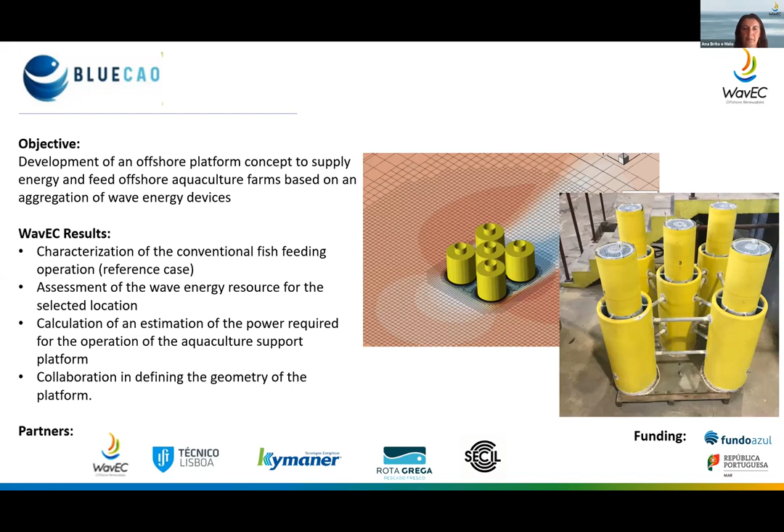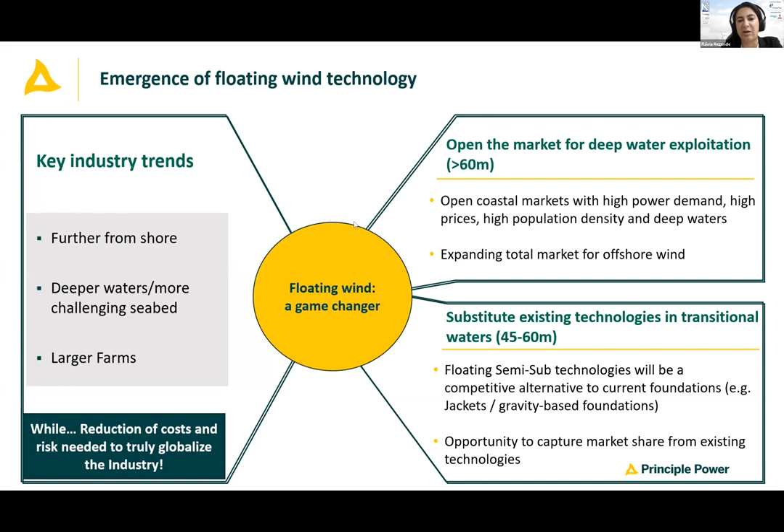So I will not repeat. I have removed the slide about the addressable market because that was presented before, in terms of gigawatts and how much it represents in different regions. I'll go straight to the presentation of the WindFloat technology, the floating foundation that we develop at Principle Power. I'll give you an introduction of the projects that we have done so far, and briefly talk about the future after that. So the WindFloat technology is a solution based on a semi-submersible concept.

The specificities about it is that it has 3 columns, and the turbine is installed on one of the columns, and the reason for doing that is to keep the turbine close to the quay, to be able to integrate it with cranes that can easily reach the column level and install the turbine without having to use installation vessels. So this is a key feature of the floater. As I think I saw in previous presentations, someone, I think it was from DNV GL, was talking about how scarce installation vessels are for turbine installation. So it's very important to lower the costs, to be able to integrate the turbine at quayside.

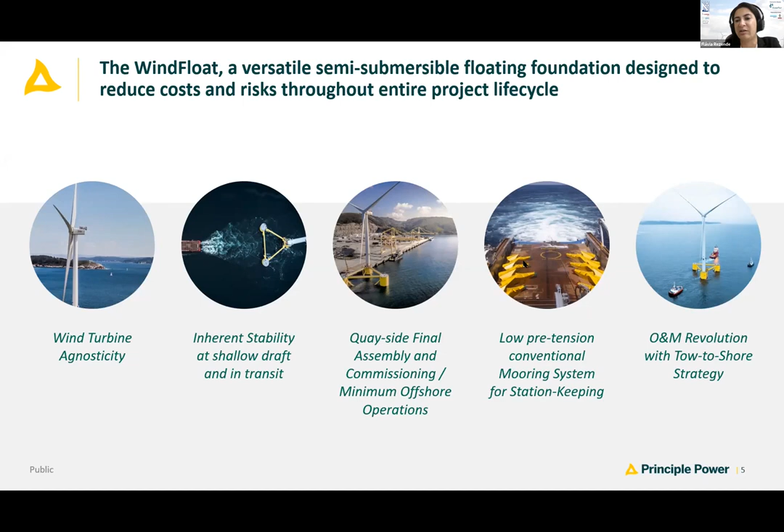So this is in a nutshell. Talking a little bit more about the mooring system, because this is also an important contributor to lower the CapEx, we base our solution on drag embedment anchors. It's a very common type of anchor and very easy to install. We use HMPE, which is for water depths in the range of 50 to 100 meters or more. HMPE has the advantage of providing very high stiffness to the system while keeping the weight very low. Keeping the weight low, as I said, is important to keep the pretension low and make the installation easier.

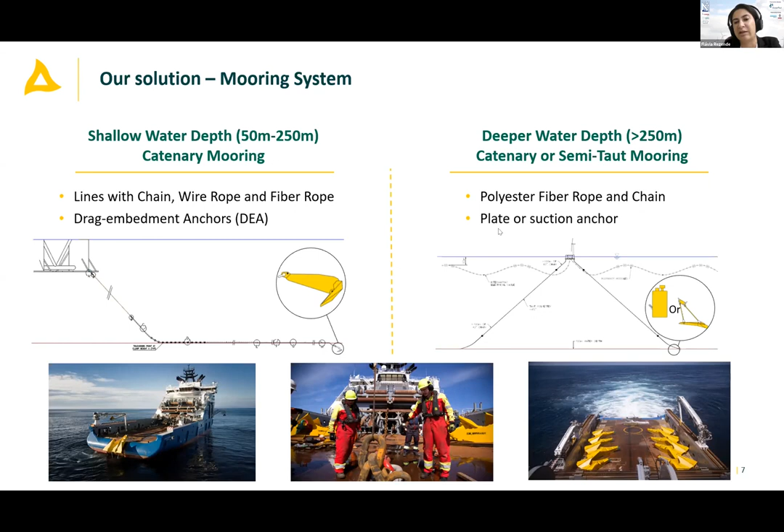We use also platform mooring connectors that are quite simple, like ball grab type connectors. And for deeper water depths, we are now moving to systems that are more semi-taut. In this case, we need to have a little bit more elasticity, so we go normally with polyester type of material, and also to limit the mooring radius. And then we go with other types of anchors, like high vertical load anchors, plates or suction anchors.

So talking about the projects and the path to the technology development, we have started with WindFloat 1 that Anna has presented. It's a 2 megawatt platform. This platform has operated for 6 years in Portugal. It has been decommissioned from the site, and we have refurbished and recommissioned it in Scotland, where it has operated for an additional 2 years, until we replaced it by 5 platforms of 9.5 megawatts that have just been commissioned. I think I'll show you a picture later.

So at this point of the prototype, what we are trying to achieve is to demonstrate the feasibility of the concept. Sorry.

Okay, this is WindFloat. So we are trying to demonstrate the feasibility and the reliability of the concept. And we are very happy now that we have gone through all the phases from construction till decommissioning, which helped us to collect a lot of data and to feed back into our latest projects. This platform has endured a lot of storms, including wave heights up to 17 meters. Also the latest one, WindFloat Atlantic, has already gone through a storm last year that is above a 1 year return period, with the 3 turbines operating during the storm without any issue.

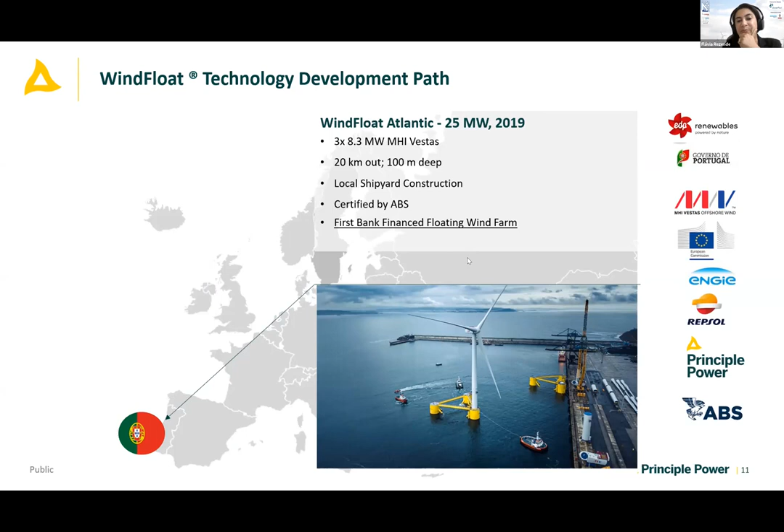This is just, let's see if it can work. This is one of a very large storm that hit Portugal 4th December last year, called the Dora, with significant wave heights in the order of 7 meters. And we can see that day, you see in the back the turbines spinning, and we can also see the floater behaviors, which are typical from a semi-submersible that is quite good.

One of the features of Windfloat is that we have an active system, because you can imagine that during a storm or even during a rated wind speed, there is very high thrust applied to the turbine. So this high thrust creates a very large overturning moment to the platform, and this deteriorates the performance of the turbine. So the active system actually balances the floater actively, moving water from one column to the other, to compensate for that action of the wind on the turbine. So you can see that even during this storm, the platforms are leveled and the turbines can operate in a good condition.

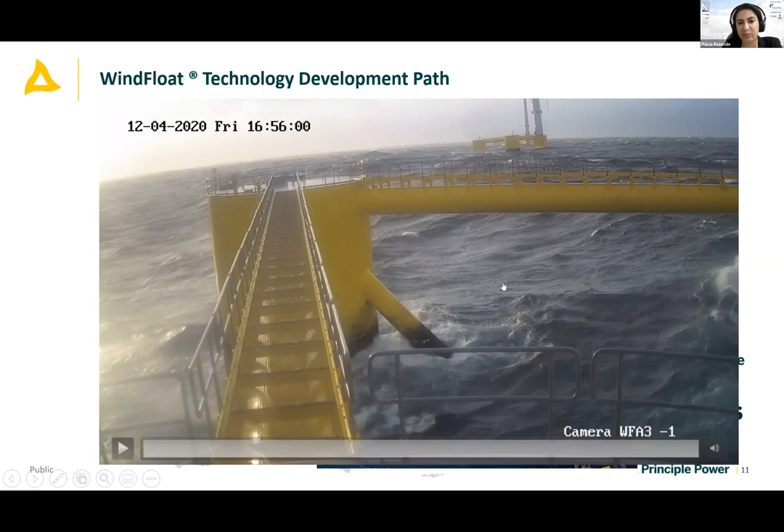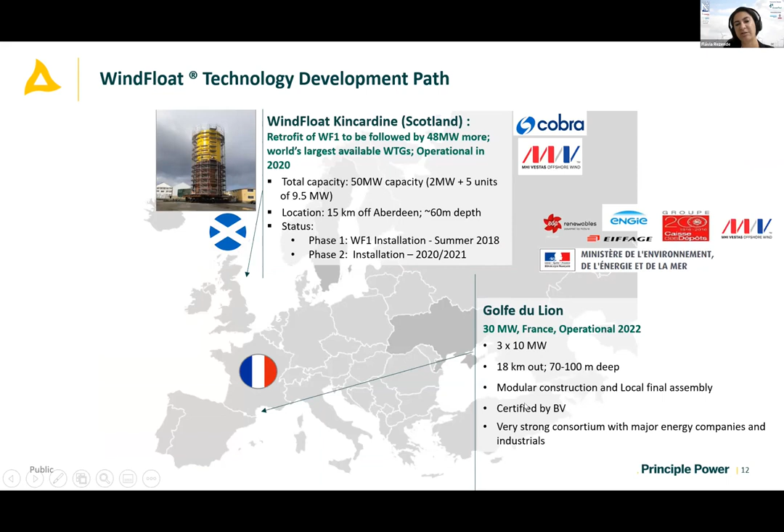So now what's next? As I said, we consider that this pre-commercial phase is reaching an end, and now the projects we are working on are already commercial projects or industrialized projects. So we are talking normally about between 10 and 50 units or more for the industrialized cases. Now we are focusing on a phase where we need to reduce costs and make this scalable. So that is our focus right now: rather than to prove the concept, which is already proven, is to make this concept scalable.

So our top priority right now is to optimize the design of the floater, working together with the turbine manufacturer to co-design and co-control the platforms, not looking into an individual platform, but on a farm. So we have projects where we can, for example, optimize the performance of the wind turbine through our control system to better orient the platform with respect to the wind, to optimize power production. Also, we have projects where we look into shallow water depths, this transitional depth between 45 meters and 60 meters, and also very deep waters in the range of 1,000 meters or more.

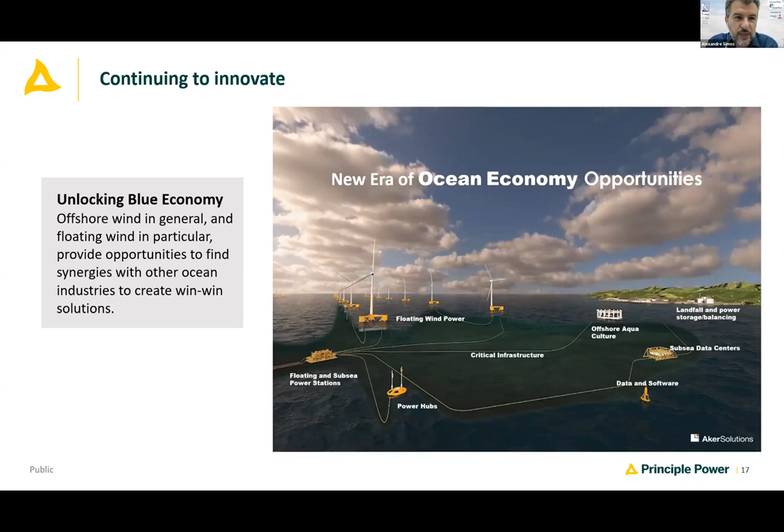We have time for one question at least, which would be, I think that for us here in Brazil, Flavia, as you know, most of the attractive areas for offshore wind are in shallow water, right? If you can just comment briefly on the competitiveness around this transitional area that you mentioned, close to 50 or 60 meters maybe. Can we expect in the near future the costs of floating wind to continue to approach the costs of fixed offshore wind? Yeah, this is our goal.

That's what we are working towards. Well, let's say that I think both have their place. As I said, I don't think we should claim that it's competitive. We are competitive. Floating wind is competitive in water depths above 40 meters.

In the transitional area, there are a number of features where we can have an advantage in floating wind, which would be in terms of turbine integration, for example, in areas where there is limited resource for offshore turbine installation, for example, installation vessels. As we said, we can integrate at quayside.

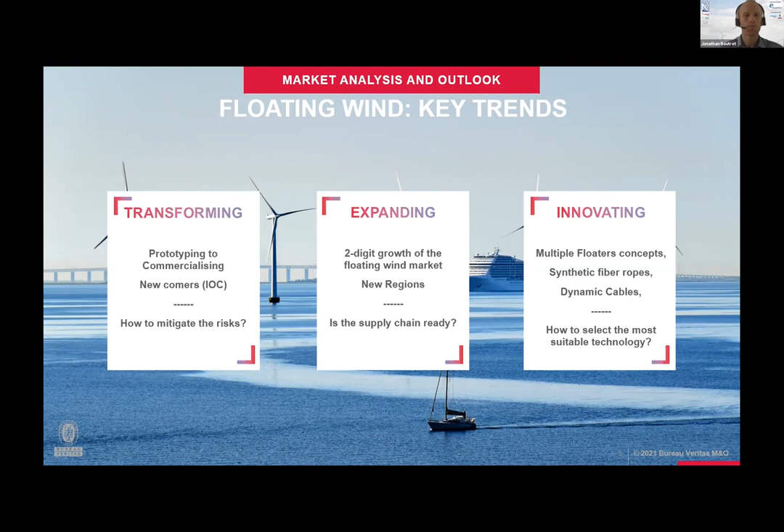So in this section, I will give you more details about the certification of marine renewable energies. First of all, you have to know that in most cases, certification is not mandatory. It means that it's not imposed by the local authority. On the other hand, it will usually be strongly recommended or even imposed by different stakeholders, typically the insurance companies.

There are several types of certification. The first one I will describe is the approval in principle and also the prototype certification. That's typically addressed to technology developers and designers, aiming at enabling the go-to-market of new technologies. After that, we can also provide project certification. Here it's mainly addressed to project developers or operators, with the objective to de-risk the projects and improve their safety and quality.

If we are performing certification of floating wind projects, it's because the certification body is in a unique position to de-risk the project. Let me explain on that. The typical setup of floating wind projects involves many different actors. You have the project developer, then you have the turbine OEM, you have also the floater designer, and even the dynamic cable designer. So you have a lot of interfaces between all these different actors, and obviously they have to exchange some information for designing their components, but it's limited due to IP or confidentiality.

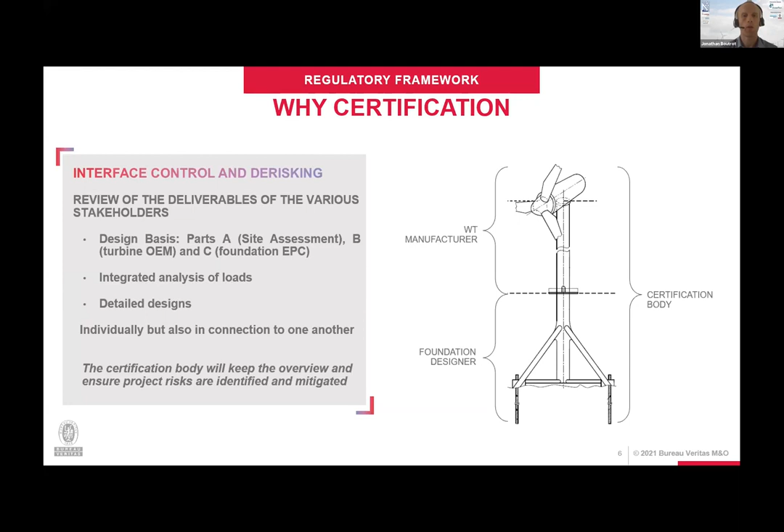On the other hand, the certification body is in a unique position to gather all the different information coming from the different designers, for instance, the turbine controller, because we'll have to build our own independent complete model of the wind turbine, including the turbine, the floater, the mooring system, everything, to verify the loads in the wind turbine. So it's very important to have a certification body on board as a third party, having a look on the entire project.

So talking about certification, indeed, this is an exercise of conformity assessment to technical standards. The certification schemes or procedures are explained in some guidelines, for instance, the IEC RE for renewable energy OD 502, or equivalently the BV guidelines NI 631. Here you will find the different certification schemes, the input, the output, and also the process will be described. And as I say, then it will refer to technical standards.

So coming back to this example of floating wind applications, technical standards applicable most of the time to the turbine and the tower will be the ones published by the IEC TC88 working groups, so that's the 61400 series. And for what concerns the floater and the mooring system, usually here we'll refer to the classification society's rules, for instance, the BV NI 572 for floating wind projects.

So just a few words on these technical standards. The NI 572 will give you technical requirements to be addressed by the designers all along the project lifecycle. If we focus on the design phase, you will find requirements on the materials, the design conditions, the load cases to be considered, but also requirements in terms of stability, structure design, so strength and fatigue, and it also covers marine systems. We've also published equivalent guidelines for current and tidal turbines, the BV NI 603.

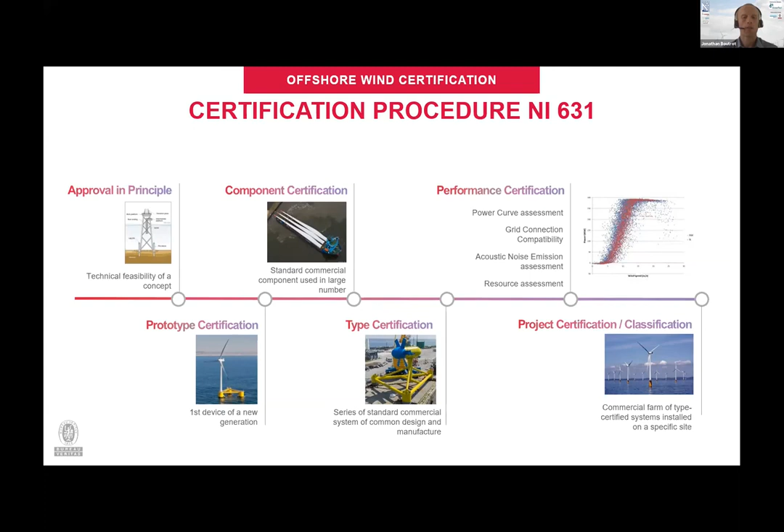So the type certification is not specific to one project. It's covering different types of project, many applications. So it means that in the context of the real project certification, we will not evaluate again all the internal components of the turbine, but we will just evaluate the validity of the type certificates. I will come back to that point.

Let me give you a bit more details on the approval in principle. As I said, it's a kind of concept certification, addressed to designers. The main objective here will be to establish the design codes to comply with. For offshore wind, it's obvious because technical standards are already available. But if I consider emerging technologies like floating solar, for instance, it's not an easy task to find appropriate technical standards. So here we have to benchmark the existing design codes and sometimes adjust some requirements to address one specific technology.

The next objective of the AIP will be to verify that the design is feasible, achievable, and contains no technological showstoppers that may prevent the design from being mature. So here it's important, it's kind of de-risking of the technology.

And at the end, the certification body will issue comments and recommendations to be addressed during the further steps of development. It's because at AIP level, usually the designer cannot consider all the different comments, but let's say the concept will at the end be a prototype, then some additional comments or recommendations will have to be addressed.

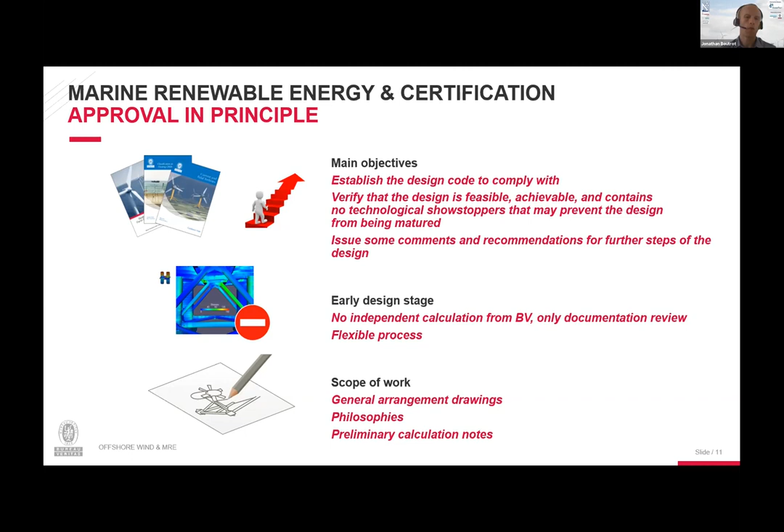For what concerns new technology, sometimes it's not possible to certify it as is, and before certifying this new technology, we have to qualify it. So at BV, we have developed guidelines for the qualification of new technology, which are based on risk considerations. So typically, we will perform HAZID, HAZOP, and FMECA, failure mode effects and criticality analysis, such as to be able to qualify the new product, new technology. After that we'll be able to certify it.

So now let me give you a bit more details on the project certification. So as I said, when we have to perform the project certification, we will consider the type and component certification which have been performed. So it means that we will evaluate the validity of the type certificates.

So this project certification scheme that you can see on the right-hand side of the slide is made of independent modules that are evaluated by the certification body one by one. And for each module of the certification, we will issue two deliverables, a conformity statement for this module and an evaluation report.

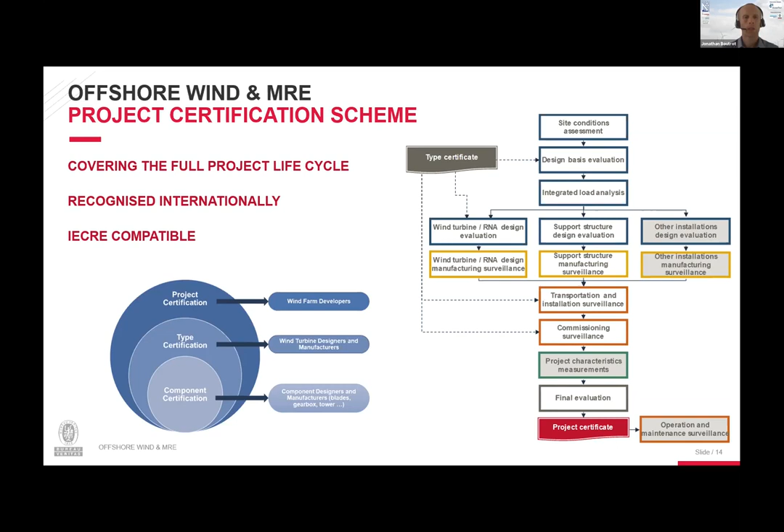So very quickly, I will go through all these modules. So the first one is site condition assessment. So here, the key question is to know if the assessment is adequately undertaken by the designer and well documented. So here I refer to the metocean conditions, the wind characteristics, regular wind and turbulence, and also the geosciences aspect.

Next is the design basis evaluation. So here it's not only one document, but it's several design bases. So the part A, which is produced by the project developer and mainly addressing the site environmental conditions. Design basis part B covers the wind turbine and the tower. So that's obviously produced by the turbine OEM. Part C will cover the foundation, fixed or floating, and including the mooring system if it's a floating foundation. And part D is for the other items like the inter-array cables.

So here, as a certification body, we'll just make sure that the different technical standards and norms used by the designers are coherent at the interfaces, so between the turbine OEM and the floater designers, for instance, and that there is no gap in terms of technical standards. Another thing that will be carefully checked by the certification body is the design methodologies. So at this stage, we will review the load cases, we'll review the fatigue methodology, the load analysis as well. So all the different project methodologies will be evaluated.

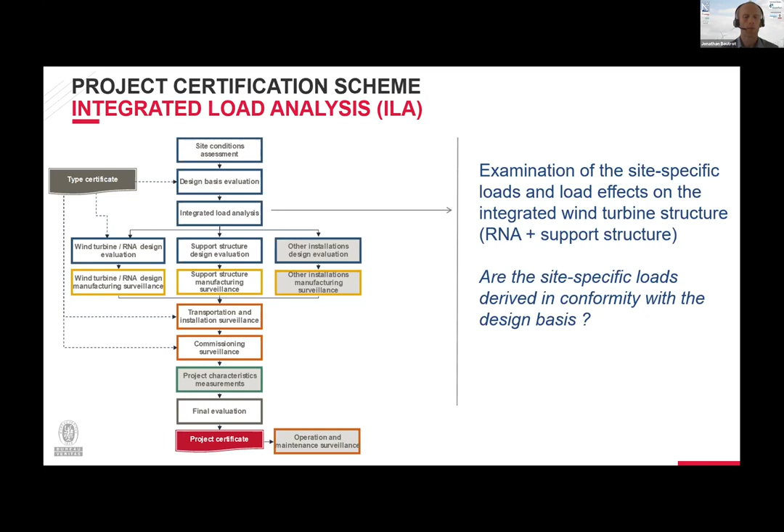So let's say that you have validated the type certificate. It means that in terms of detailed design evaluation of the wind turbine, you don't have to do much because it's already covered by the type certificates. On the other hand, you'll have to analyze carefully all the site-specific components. So that's the tower, which is designed for, let's say, optimized for each site, the foundation, floating foundation and the mooring system, and the inter-array cables, if covered by the certification.

So during this design evaluation module, we will make sure that the methodologies that were described in the different design bases are properly applied by the designers. And in parallel, we'll also perform independent analysis to validate the results of the analysis performed by the designers.

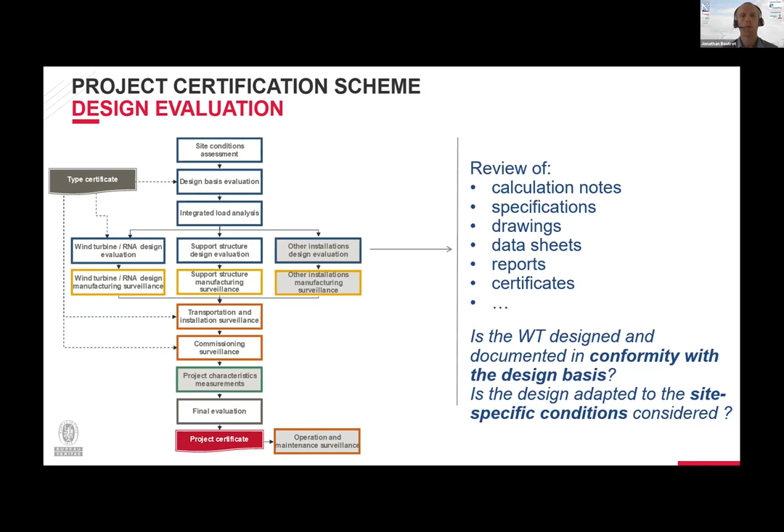So the next steps are about manufacturing, transportation, installation, and commissioning. So here there are two main activities. The first one is the documentation review. So we will review the quality system of the different sites, just to make sure that the manufacturing site is certified according to ISO 9001. We'll also make sure that the different welders and NDT operators are qualified to perform their jobs.

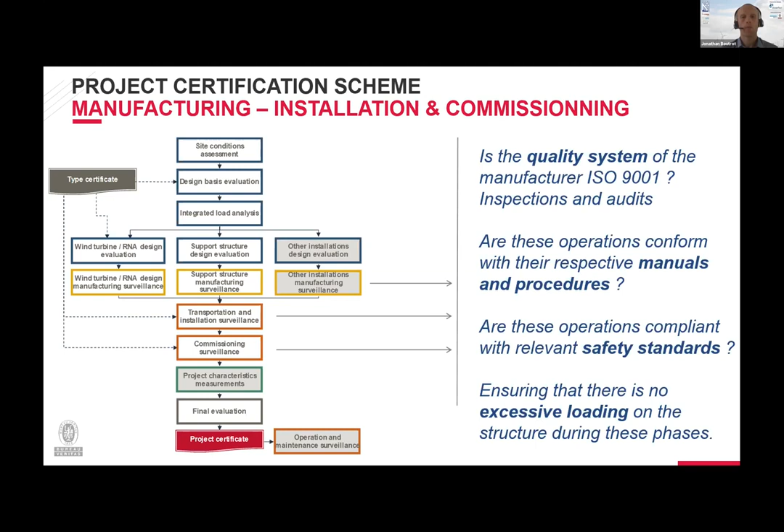After that, we will also perform regular inspections, such as to evaluate the base materials. So we'll review the steel or different materials certificates. And we'll also witness the different assemblies that are produced by the manufacturing places. So we'll carefully review the different welds, the tolerances in terms of misalignments, etc.

During the T&I phases, we'll act in parallel to the marine warranty surveyor, which is another third party acting during the same phase, but looking at different things. So here, we'll just make sure that the transportation and installation procedures are in conformity with the methodologies that are described in the different design bases. So that's the primary objective.

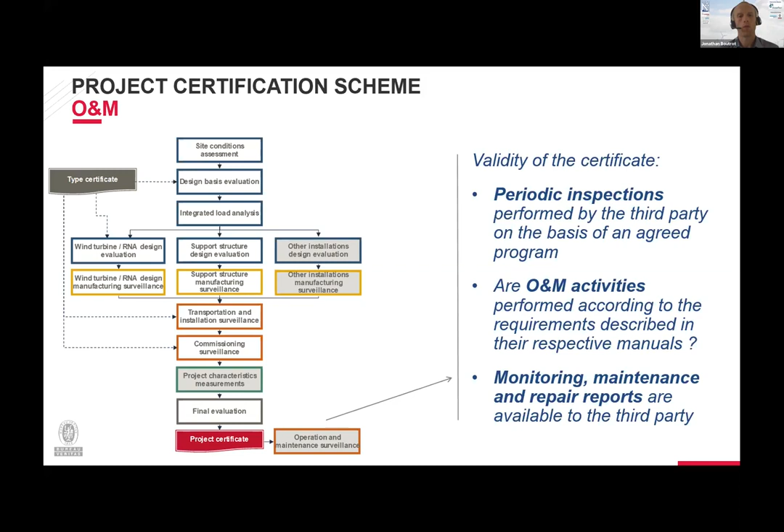So once we have validated all these different modules that I've explained, we'll be able to issue the final project certificate. After that, we could also certify the O&M, so the in-service phase, performing regular inspections, periodic inspections that are based or not on RBI, risk-based inspection regime, and agreed with all the parties involved. So that's it for me for this overview of the project certification.

Don't hesitate if you have any question. I can take a couple of them, I think. Thank you very much, Jonathan, for the nice and instructive presentation. Certification is surely one very important topic in our discussion today. I think we have time for one question.

I have one from the audience, from Ingrid Silveira. I don't know if you can answer on that, because it's related to wind measurements. She says, what is usually the certification procedure for offshore wind resource measurements? Is there a common understanding about the best practice for this procedure? For example, LiDAR measurements or onshore met masts?

Yeah, so usually a floating LiDAR will be deployed on site. So I think that's maybe the best option and most accurate option. If you want also to optimize the design, the first step will be to evaluate properly the environmental conditions, because we know from experience that it has a very strong impact on the design. Maybe the wind turbulences, for instance, may have an impact on the fatigue performance of the mooring system in some cases. So I think it's very important to evaluate properly the site conditions.

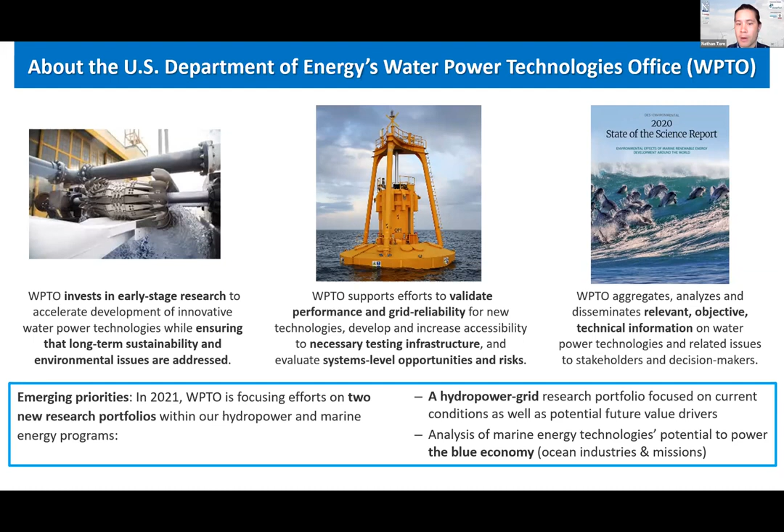Also, and I believe this was already shown by the first speaker, helping to evaluate environmental impacts of marine energy and traditional run-of-river systems on the environment. So why we need the funding and support from the WPTO: I expect that everyone on this presentation is a naval architect familiar with working in the water, and we know that working in the offshore environment is difficult. At least for marine renewable energies right now, we have a fairly prolonged design and testing cycle of taking something from paper, getting it to a sub prototype in a wave tank, to getting it to a smaller pre-commercial offshore device, and going all the way up to a larger WEC array or marine energy system array.

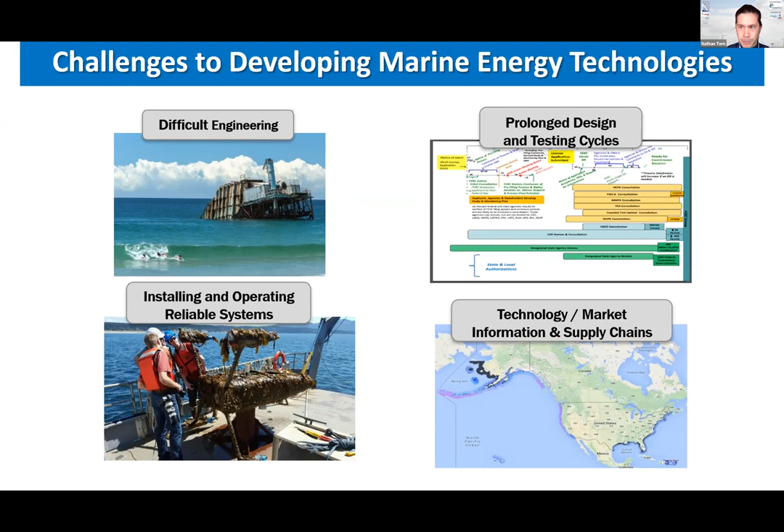And so in response, compared to some of the other renewable energy technology programs funded by the US Department of Energy, such as solar and wind, the marine energy group is much younger. There was not really an official program established until 2008. At that time, it was mostly getting a program established within the United States, establishing a set of national marine renewable energy centers, which consist of different universities in the US that focus on marine engineering, specifically marine renewables, and also establishing several federally funded laboratories to do work in this field, which includes NREL, the Pacific Northwest National Laboratory, as well as Sandia National Laboratories.

And so from 2008 to now, there have been several major projects and efforts, starting off by giving funding to industry to develop concepts, given that really long design timeline mentioned on the previous slide, getting developers working to get prototypes in the water, doing resource assessments on the US and all of the contiguous islands, and starting to do reference models to see where we are. The reference model project I'll discuss a little later, but it was benchmarking the state of the art earlier in the 2010s.

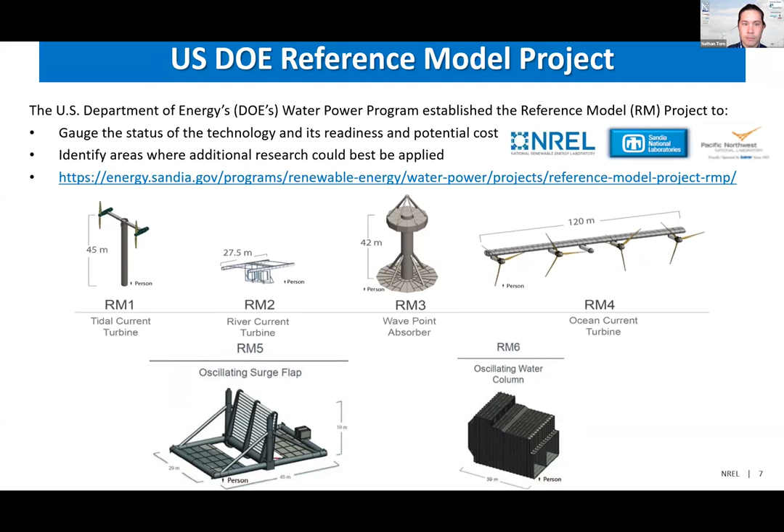And then one of the largest devices that is going to be tested, and is, I believe, right now in dry dock, or at least at its berth in Hawaii, is the Ocean Energy OE35 oscillating water column. And that is kind of where a lot of our developers go to do their first testing. It's the first time in the water with a fairly large device.

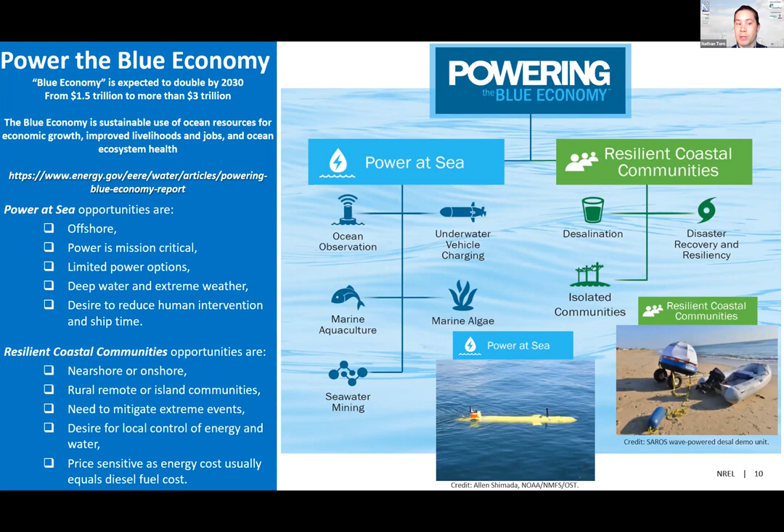And it's a really good case study of ORPC had spent a lot of time with the community figuring out what they needed. It's easy to say that we want to transition this community off of diesel, but it's very important to figure out what they need. They want to make sure that the lights are always on, and they also are very conscious of the environmental impacts because it has a very large salmon run through their village, which is what they need to survive. And so it was just a really good, I think, case study of how, as engineers, we need to go into a community, make sure that whatever we are designing is going to fit what the community needs, because if not, then they won't ever adopt it.

We also are looking at supporting some of these research efforts through prizes. So one of these is the Department of Energy's Waves to Water Prize. And this is looking at trying to develop cost-effective desalination systems that are powered by renewable energy systems. This prize is a little bit also looking at trying to find designs that can support the disaster recovery. So one of the key features of this prize is that any concept that anyone is proposing would need to be set up within 48 hours.

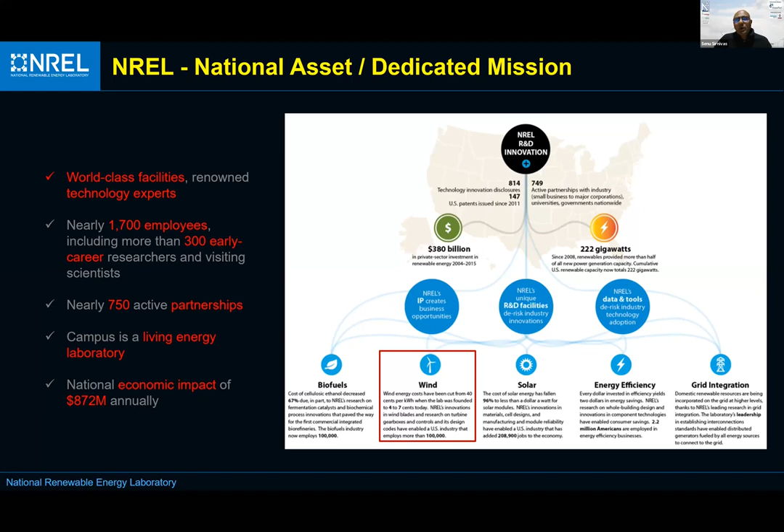One other thing I want to mention is we also have a lot of industry collaboration, not just with academics, but also industry, like GE and Siemens and so on on the wind side. And as Nathan mentioned, we work with a lot of the water power folks as well. So I just quickly wanted to show you a picture of the campus itself. This is the wind side, not the main Golden campus.

This is a campus where we actually have wind turbines on site, and we instrument them and test them. We have very strong, extreme winds coming down from the other side of the mountains, up to 80 miles an hour, hurricane level winds, and sometimes the wind center closes down because the winds are just too extreme. We instrument the blades, and we have met towers there to measure the wind and see what happens to the blades.

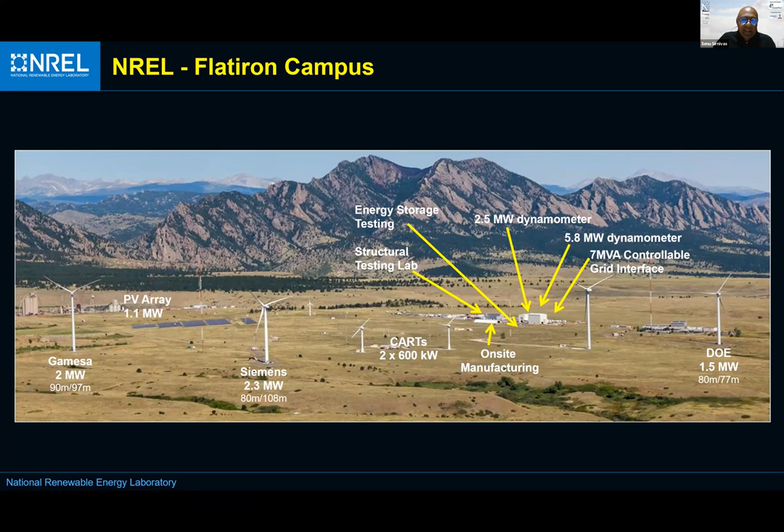We have a structural testing center where we can test the blades until they crack and do fatigue testing on them. We have a dyno, and what's next on the list is a power control center that can integrate power coming from solar, from wind, from different sources, and figure out how we control it in the grid. That's not shown here on this picture.

Moving on, I quickly want to address why floating offshore wind, at least in the U.S. The recent administration, the Biden administration, has put a big focus on climate change, and also a big focus on offshore wind, and it's been talked about quite widely here.

The only way we can get to what the government needs, 35% wind electricity, is to go to offshore wind, because land-based wind already occupies a lot of the middle part of the U.S. There's still space there, but we cannot get to 35% U.S. wind electricity without going to offshore wind. So I just quickly want to illustrate that.

If you look at this chart, you would see that fixed bottom is about 42%, that's about 36 gigawatts. When I say fixed, I'm talking about less than 60 meters depth. And then floating is above 60 meters, and we're at 58%, right?

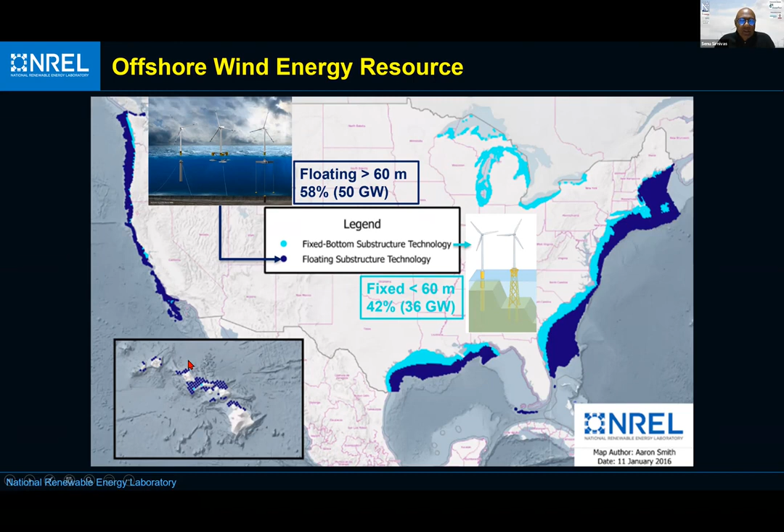But you can see the first projects that are probably going to go in the water are going to be fixed bottom. There's already one in Rhode Island that's been operating 5 turbines out there, 6 megawatt each, I think, and that's fixed bottom. And there's a lot of leases that have been awarded in the New York area and New Jersey area. There are leases being planned right now for California as well. And there's also very deep waters in Hawaii as well, right?

So if you look at the US, we're behind in terms of deployment compared to Europe. Europe is just way ahead in the game, but from our side, we have to compete with other energy resources. Even though they're not renewable, we have to compete with them, and we have to have a market for them. And I'll talk about that in a little bit here.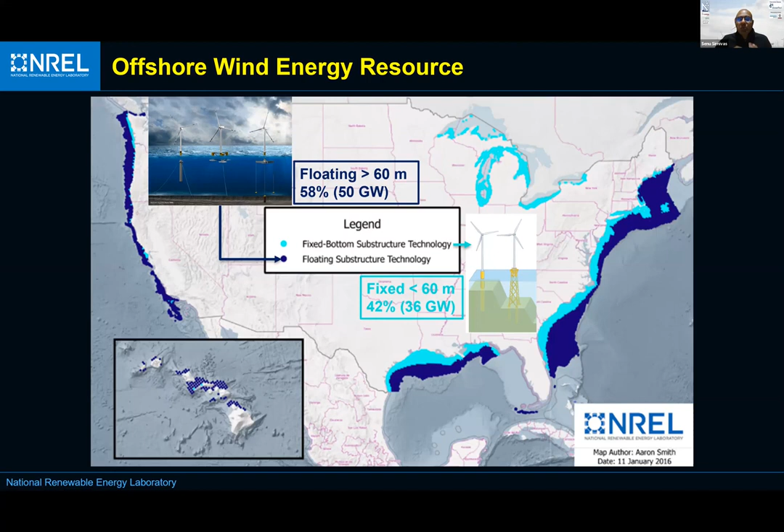So moving on to the next slide here, to just quickly address, what was the problem with floating wind to start with? One of the problems we had with floating wind is, we are borrowing a lot of technology from oil and gas, right? And I come from this industry, and we always build one-off things. We don't mass produce them. We build one-off things for a specific site. So we have taken this oil and gas technology, and now we have floating offshore wind, jackets or monopiles or whatever. They're all really borrowed from oil and gas.

And one of the things that I wanted to say was, I think there are better ways to design floating wind technologies, or even jacketed structures for offshore purposes, to bring the LCOE down, to make it competitive with other sources of energy. And at least in the US here, there's been a big push from the Department of Energy, particularly ARPA-E, recently. Last year they had an award for 5 different Area 1 projects that were looking at innovative structures for floating platforms.

And the idea here is to look at the system integrated, right? And what I mean by that is, you're not just going to do a decoupled analysis, getting information from the turbine manufacturer and then, uncoupled, doing a simulation with the floater itself. What ARPA-E wants to do is what's called control co-design. How does the whole system react, and how can we optimize the entire system? That includes the turbine, the tower, the platform, the mooring system, anchors, and so on, right?

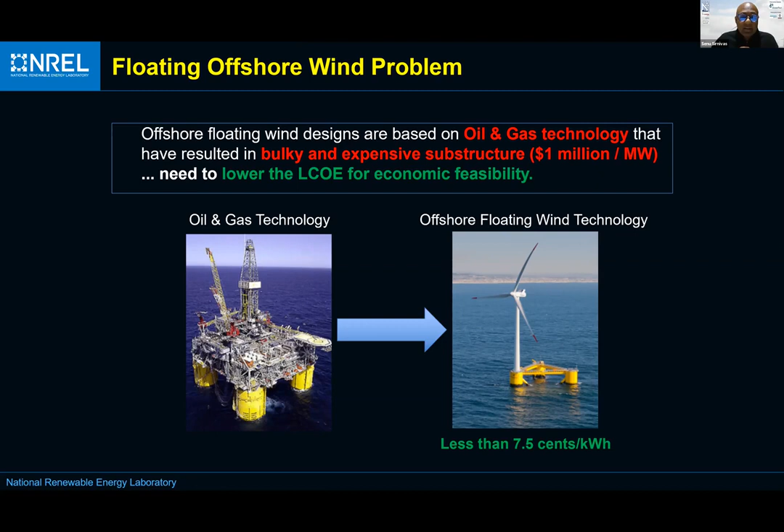And the other thing that's important for wind, and I think this is true everywhere, and particularly here in the U.S., is collaboration. So one of the things I want to say, a lot of the tools that NREL has are open source.

You can go download them, you can use them, and you can go into the forums and ask questions. So we have these advanced tools that we have at NREL here. We work with standards, we work with theory, and innovations, like for example, what's coming out of ARPA-E, and we're modifying a lot of our codes to adapt to the innovations that are coming out of the Area 1 teams there. And we are making our engineering tools so we can look at advanced wind technology, right?

We have test data, and we have a computational center here with high fidelity modeling, where we have an HPC center that allows us to run very large simulations in computational fluid dynamics as well. So we incorporate all this, and then we have the advanced wind technology. And now what we want to do is, the labs can't just isolate themselves and work by themselves. We have to work with industry.

If you look at it, the wind industry is ahead of the water power industry in the sense that there are commercial applications for the turbines and whatnot. So they are way ahead. And how do the labs such as NREL and other labs work with industry to actually advance the solution, right? So in this space, we're looking at a lot of different things. We're looking at new actuations, advanced sensors, definitely a lot of CFD solutions on how to do wind plant control and not just control of individual turbines, right?

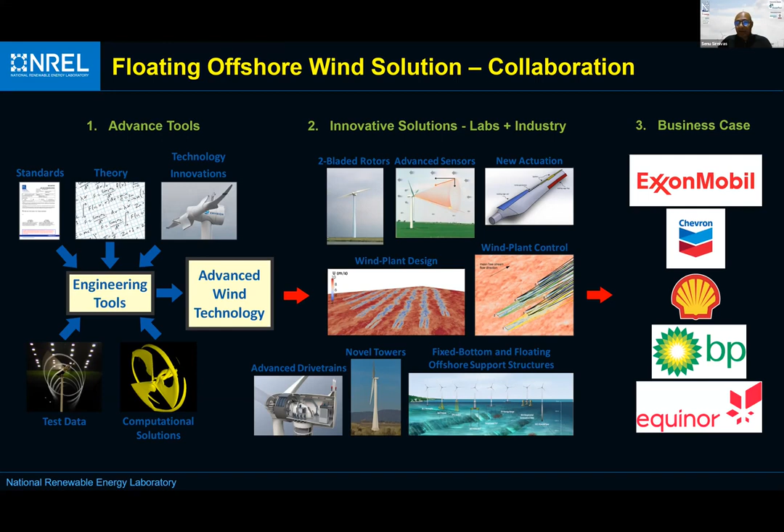So I quickly wanted to go through the three challenges that we're trying to address, and there's a paper out there that you can go take a look at. It's a very good paper, quite thorough, and talks about all the different challenge areas that we need to address going forward in the wind industry. One, of course, is to understand the atmospheric physics, the flow physics, that is still evolving, right? And we're doing a lot of the work here at NREL, looking at meso-micro coupling of larger simulations to smaller simulations, and so on and so forth.

And then you have, of course, how does the platform react? What are the aerodynamics, the structural mechanics of the system itself? And then you have the grid integration. How does the wind system integrate to the power grid, right? Because wind is not always going to be there. We have to balance it with other sources of energy. And how do we do that? So that's another big area of research here at NREL.

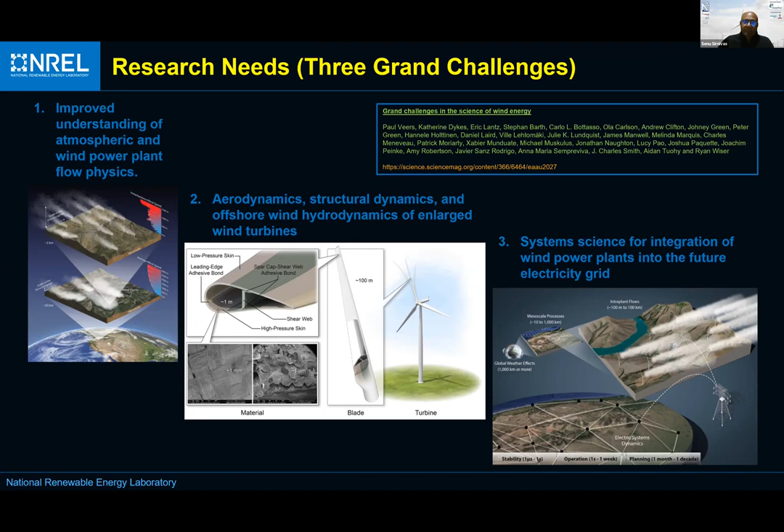I quickly wanted to go over the open source tools because I talked about this, and as I said, anyone can go download all the tools that we have, and you can use them. And a lot of the academics use them, and industry uses them as well. And we have different model fidelity, right? For example, at an early stage when you're looking at something, you want to do something really quick. You could use something like FLORIS, for example, to do wind plant control optimization, etc.

Now, if you want loads on the wind turbines and so on, then maybe you want to move on to OpenFAST or FAST.Farm. OpenFAST is a single turbine, but you can definitely use FAST.Farm, which is OpenFAST simulation, but you have multiple turbines, right? And you can get loads from the turbines, and then you can do your design analysis.

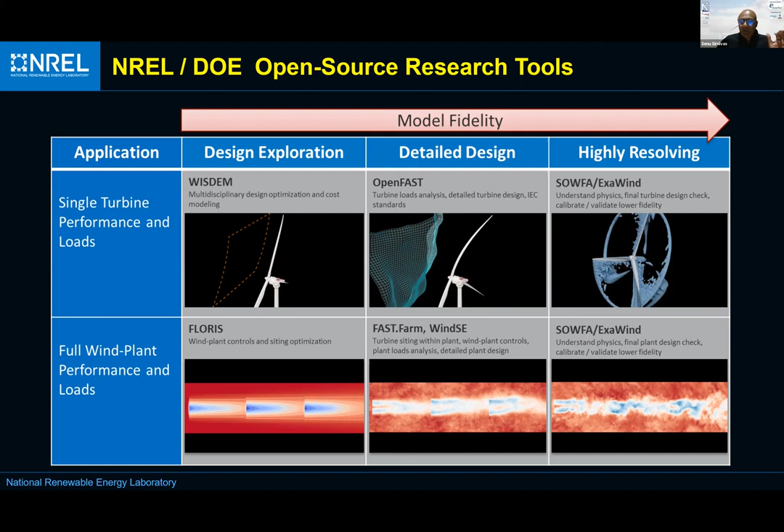Now, when you talk about looking at the atmospheric interaction, the flow physics with wind turbines, then you want to go to maybe a high fidelity modeling tool like SOWFA and ExaWind, where you can really do blade-resolved simulations and things like that. Now, of course, this comes with a computational expense, right? You need a big high performance computing center to run simulations like this. But these are the kind of things that we're doing to try to address the three research areas that I talked about earlier. And as I just wanted to point out again, these are all open source. You can go download them and you can use them. Now, I'm just quickly going to go through some of these tool sets that I mentioned.

So this is the OpenFAST tool. If you look at the OpenFAST tool, this is really the core for a lot of the research that we do, and this builds into a lot of the other tools we have. If you look at the OpenFAST module, we have InflowWind, AeroDyn, HydroDyn. These all do different things, but they're all modular. They come together, and you can do a simulation of the entire floating wind turbine or fixed bottom in the time domain, right? And you can run the IEC load cases and so on and so forth.

And there's also linearization, because linearization is important for us to understand how the system reacts, so we can build controls around it, right? So that's another big reason why we use OpenFAST, and we have the ability to really look at the system as a whole.

Now, the next one here that I want to talk about is FLORIS. Now, this is the very low end. You can run this on laptops and whatnot, and you can run the entire wind farm, right? And you can actually do a wind farm layout. Let's say, for example, you have an area you want to develop and you want to say, hey, where do I really need to place my wind turbines?

You can use FLORIS and say, okay, try to optimize the layout to produce the maximum power production, right? And you can also implement wind farm control, not individual turbine controls, but you can control the wind farm. Maybe you want the front turbines to produce less power, so the turbines in the back can produce more power. So overall, in the wind farm, you can produce more power as a collective.

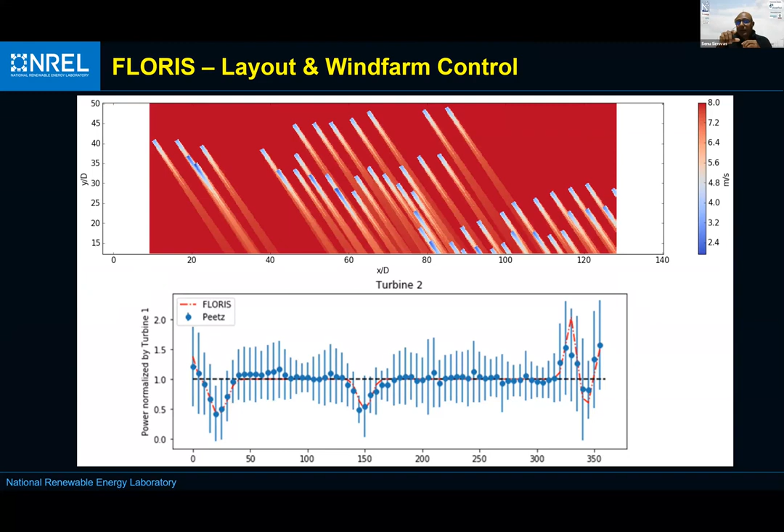Going on to the next slide here, this is FAST.Farm, and the animation that you see here is just for a single turbine. But what you can do here is have multiple turbines, and we have done simulations up to 100 turbines in FAST.Farm. We look at how the wake in the front turbines affects the turbines in the back and power production, and we can also change the controls and the angles that the blades are angled to, so that we can produce more overall in FAST.Farm.

This is just a higher fidelity model compared to FLORIS. FLORIS, you want to use it to do wind farm layout and things like that, and maybe some optimization of where the turbines should be placed. And then you can go to FAST.Farm, which will be your next level, where you're looking at more details and trying to get loads from the blades and the platform and whatnot, so you can do more design work on it.

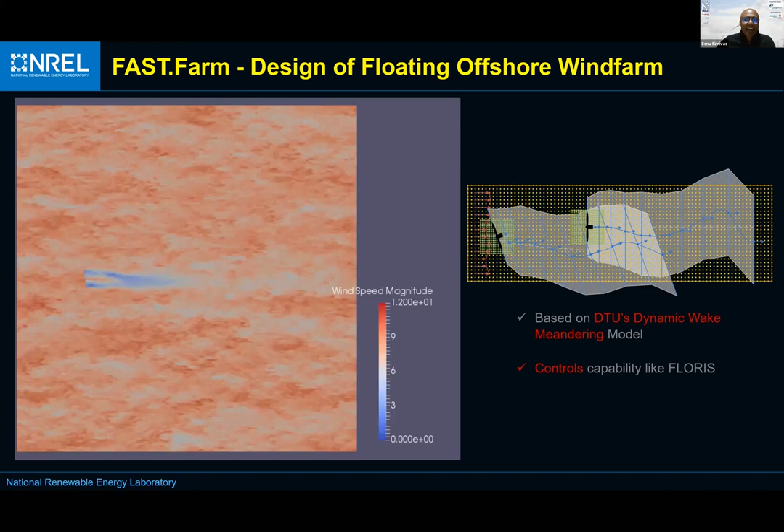So going on to the next one here. Let's see. It's kind of stuck. Oh, there you go. I think I moved too quick.

All right, so the next one here is, of course, high fidelity modeling, right? We talked about FLORIS, which is very low fidelity. You can do it quickly. You can look at lots of cases. Then you can run it in FAST.Farm, which is higher fidelity modeling. And then you can really go to very high fidelity modeling, where you can look at the wind park.

I think this is a wind park in Denmark, where you can see the flow going through the system, and you can see the wakes being generated and so on and so forth. And down there, you can see how the simulation actually replicates some of the measurements that were made there at the time. I'm going to go to the next slide here. I know we're running out of time.

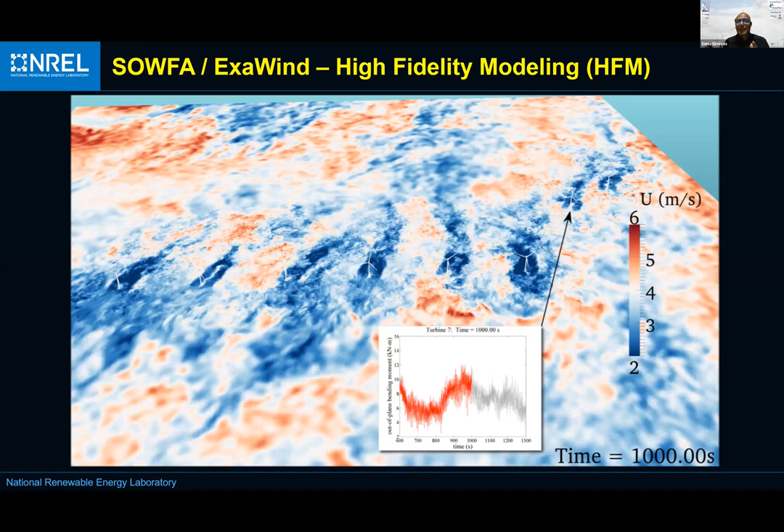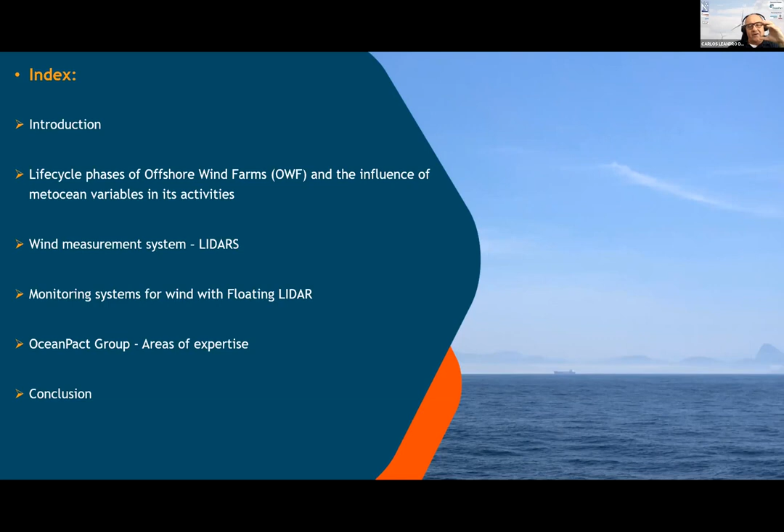Yes, fine. Okay. Then the presentation is about metocean data to support planning, installation, maintenance and operation of offshore wind farms. And this is an index. I talk about a quick introduction, life phases of offshore wind farms and the influence of metocean variables in these activities, wind measurement systems like LiDARs, monitoring systems for wind with floating LiDAR, and the expertise of the OceanPact group to support offshore wind farms.

Introduction: for wind farm projects in Brazil's exclusive economic zone, it's very important and necessary to support with metocean information. In the case of companies, we help to choose the more suitable area. The projects need support in choosing the best technology, materials, and size of the wind farm, and the Brazilian authorities to allow companies and energy auction in the future, because we know we need 3 years of continuous data in the ocean to have a good place to really operate or install the offshore wind farm.

Metocean data is largely used in Europe to support assessment of wind power generation potential, and also in the US, metocean data is recommended by BOEM as a basic stage of the strategic assessment of offshore wind investment. The metocean characterization recommended practices for US offshore wind energy have the norms and parameters required by this institution for any analysis, whether strategic, operational, or environmental. In other words, it covers all the phases.

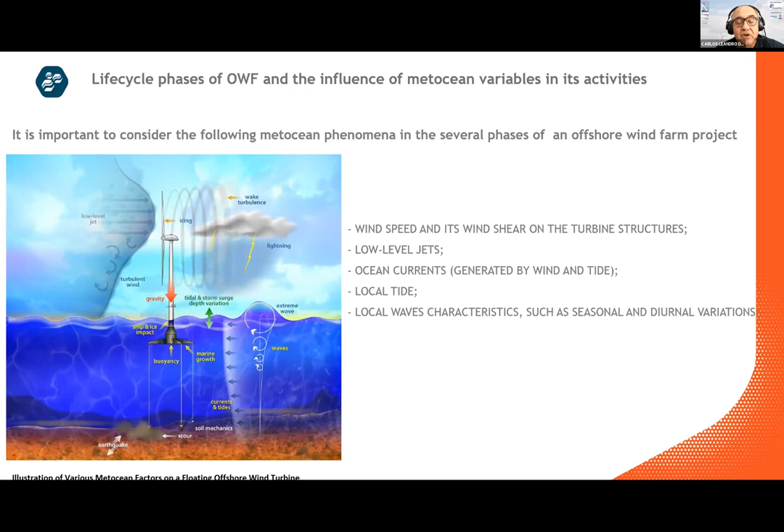The life cycle phases of offshore wind farms and the influence of metocean variables in its activities. Important to consider the following metocean phenomena in the several phases of the wind farms: wind speed, wind shear on the turbine structure, people talk a lot about this, low-level jets, here in our figure. Ocean currents driven by wind and by tide in the area, principally northeast of Brazil. Local tide, low level, high level in terms of water level.

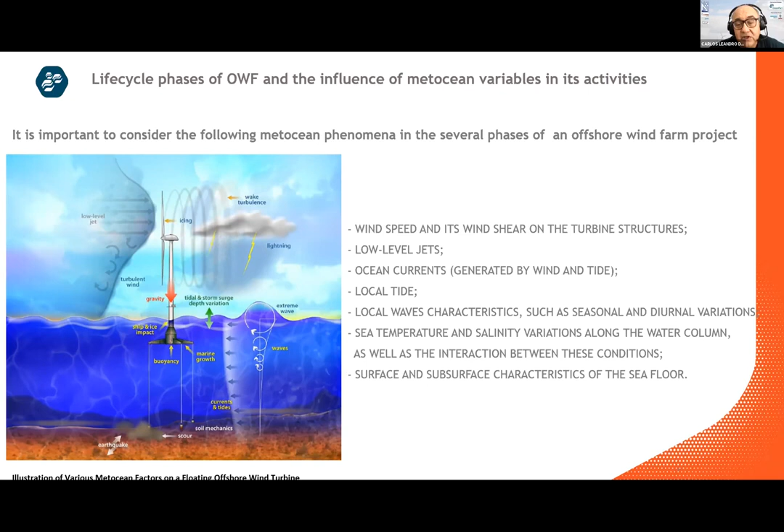Local wave characteristics such as seasonal and diurnal variation, sea temperature and salinity variation along the water column, as well as the interaction between these conditions. We need to integrate all these variables, and of course surface and subsurface characteristics of the seafloor, because we need to install directly in the seabed, or anchor the system over there.

Well, the life cycle phases of the offshore wind project are: planning, 1-2 years continuous, in which you need to obtain the environmental permit, the colleague from IBAMA talked about that. Design, 5 to 8 years. Transport and installation, 1 to 3 years. Operation and maintenance, 2 years plus. And in the end, decommissioning. One day we need to consider taking everything out from the ocean or not, depending on the situation, the design, many questions.

The planning phase includes the early stage of the project development process, including initial identification of the place, the region, the area, conceptual design, site assessment, and permitting. You need a permit to continue operating. In case of wind, you have the statistics: minimum, mean, standard deviation, maximum, and distribution in terms of velocity, wind direction, also wind profile, wind shear, turbulence. Develop reliable power output curves, that's fundamental. Determination of wake effect and assessment of overall wind facility performance, including project losses.

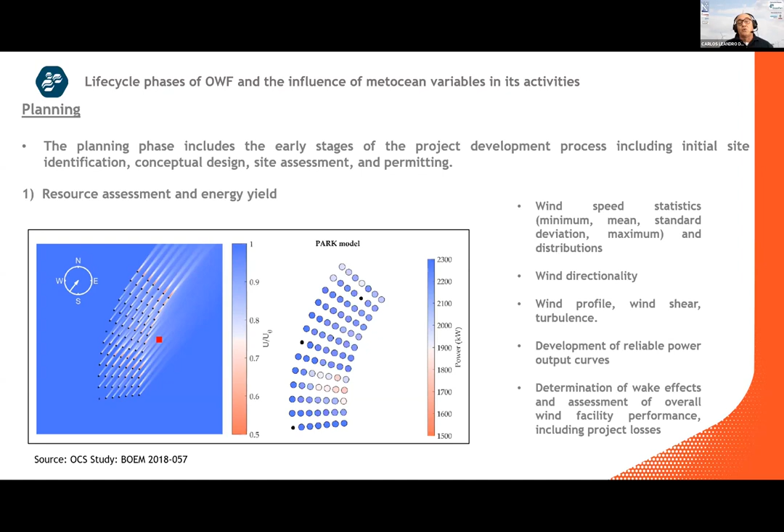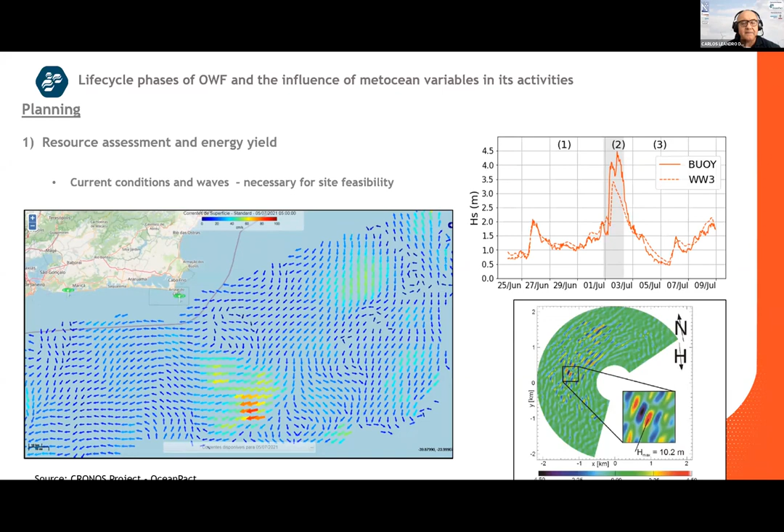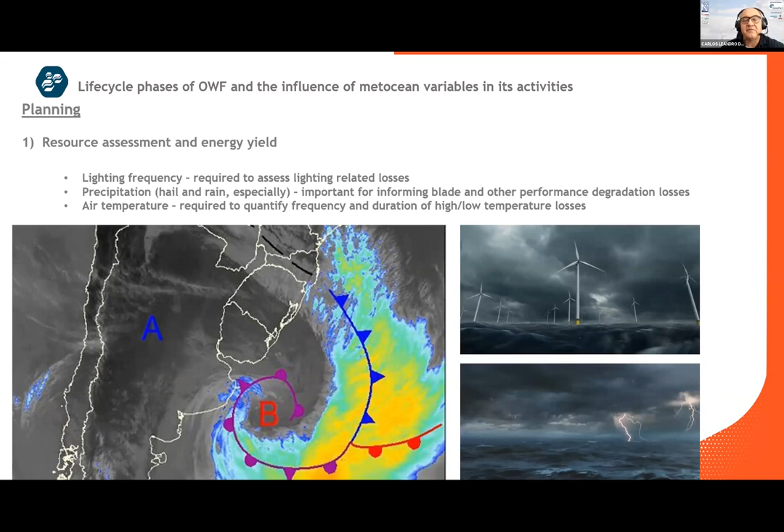The planning continues, then you have to consider also the lightning frequency. It's very important. Hail and rain, especially the strong ones, okay, because this can impact your offshore wind farm for the long term, okay, in terms of fatigue of the material also.

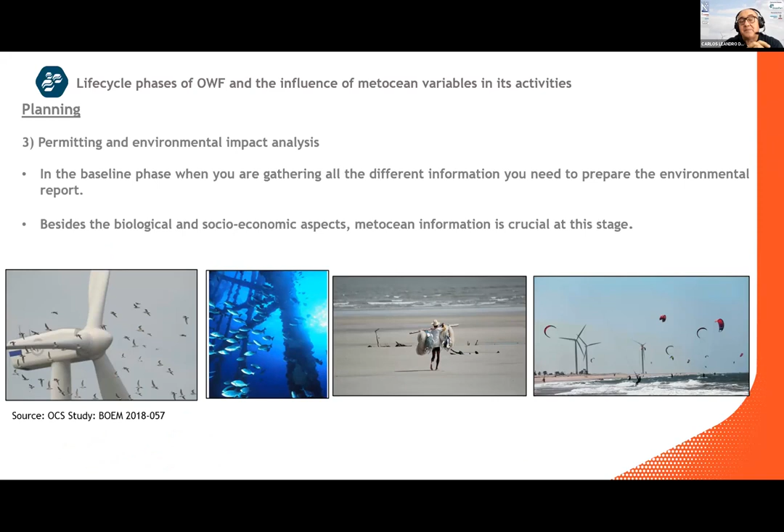In terms of feasibility assessment and conceptual design, you need to consider adequacy of the wind resource, sea water temperature, the bathymetry and site survey of the region, wave condition, current, water level, and extreme conditions, of course. Permit and environmental impact analysis. In the baseline phase, we want to get the different information needed to prepare the environmental report, okay? Besides the biological and socioeconomic aspects, metocean information is crucial at this stage.

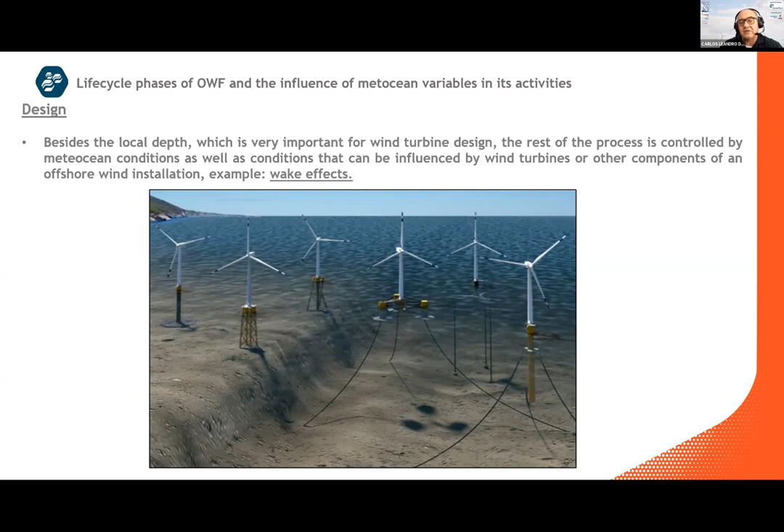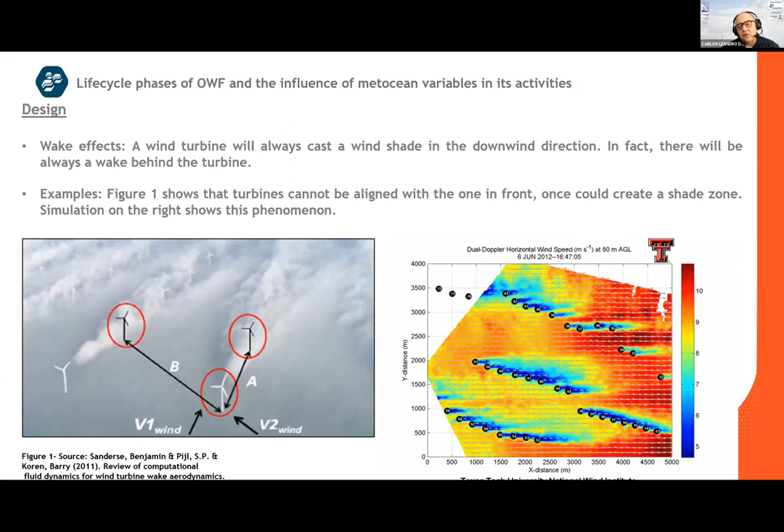Besides the local depth, which is very important for wind turbine design, the rest of the process is controlled by metocean conditions, as well as the conditions that can be influenced by the wind turbines and the other components of the offshore wind farm, like, for example, the wake effect. People talk about this, I just talk a little bit about it, but I put this just to consider this kind of effect on the turbine. Then we need to have a good wind data measurement and prediction also, okay?

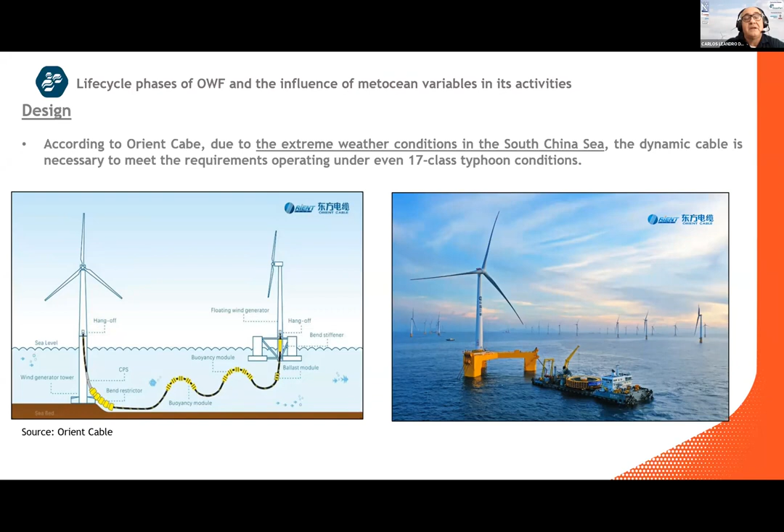And I separated this slide because recently I see this operation, the people in the South China Sea, using the dynamic cable that is necessary to match the required operation, the 17-class typhoon condition. Okay, the extreme weather condition, we need to consider this when we talk about the design of your offshore wind farm. Exactly as we talked about before: normal condition, extreme condition. You need to consider this definitely in your operation.

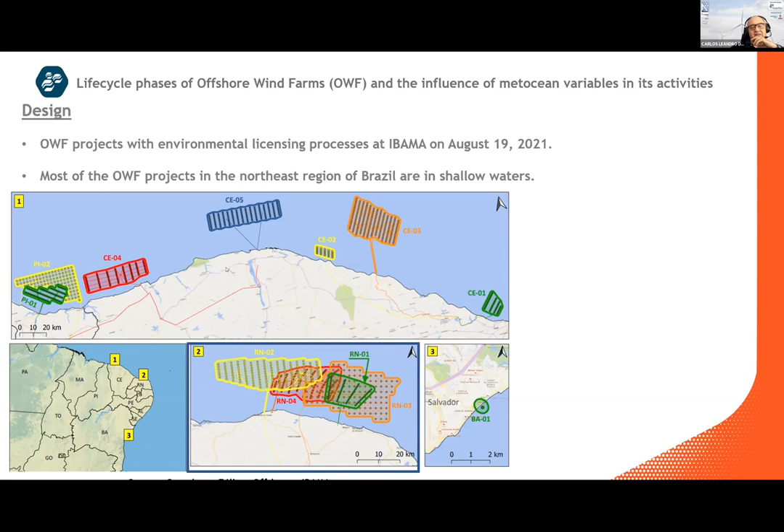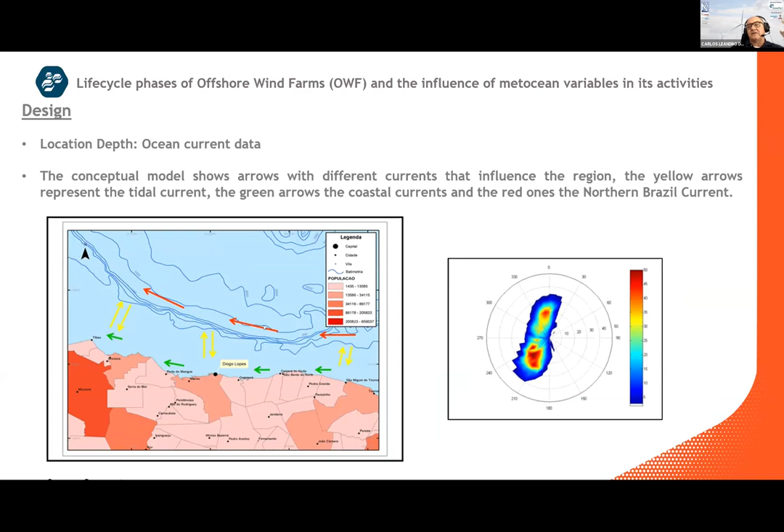And in terms of design, we need to consider, of course, the shallow or deep water enterprise. In that case, we use this figure from IBAMA to show exactly what happens when you are in a shallow water enterprise. The conceptual model in this area, for example, northeast of Brazil, on the coast of Rio Grande do Norte, you can see, for example, the longshore current here in green, the tidal current in yellow, and the red is the North Brazil Current. Okay, that's important. Why?

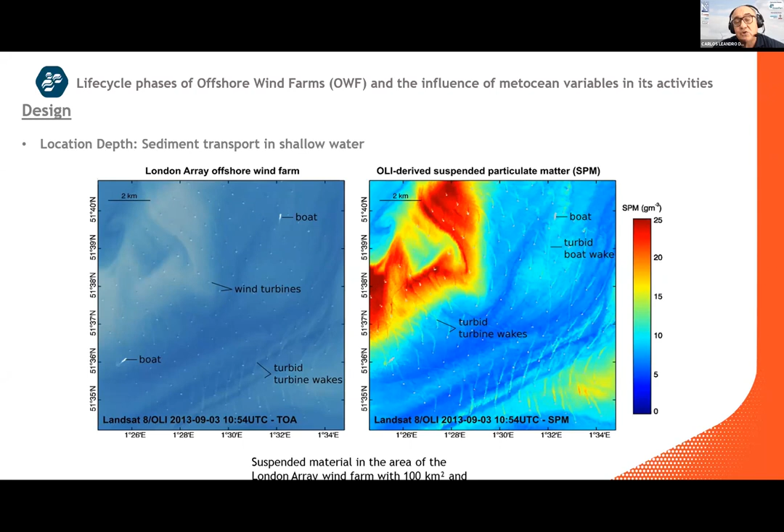Because the sediment transport in shallow water is very, very important to dimension it. I took this picture from the Landsat image in London. You can see the wakes of the turbines, exactly because it's shallow water, because there's a lot of sediment in the region. Then, when you consider installing offshore wind farms in northeast Brazil, people will need to consider this in the design phase.

Okay, transportation and installation. For the transportation and installation phase, ocean data are required to support the construction planning, real-time monitoring, and forecasts during construction. I separated this figure from the CRONOS project because in our project we use an integration of HF radar, satellite data, and in situ data to integrate and assimilate in mathematical modeling in order to have a good forecast in terms of the currents and the waves, of course, principally, okay? And this can support your transport and installation operation.

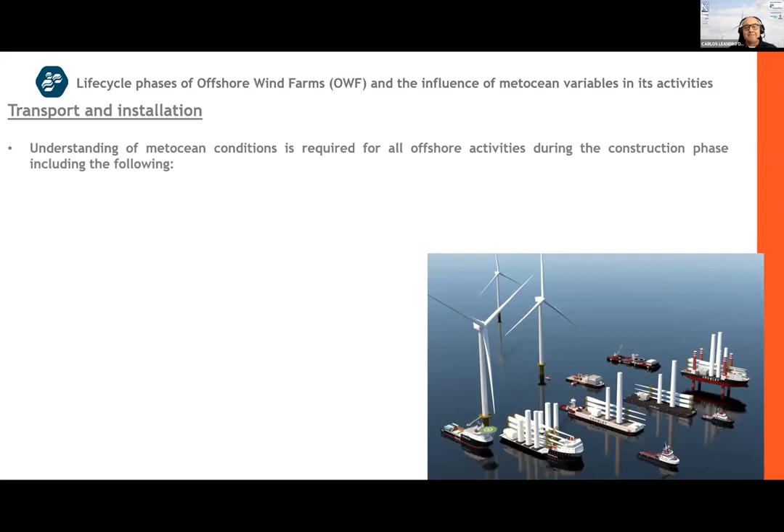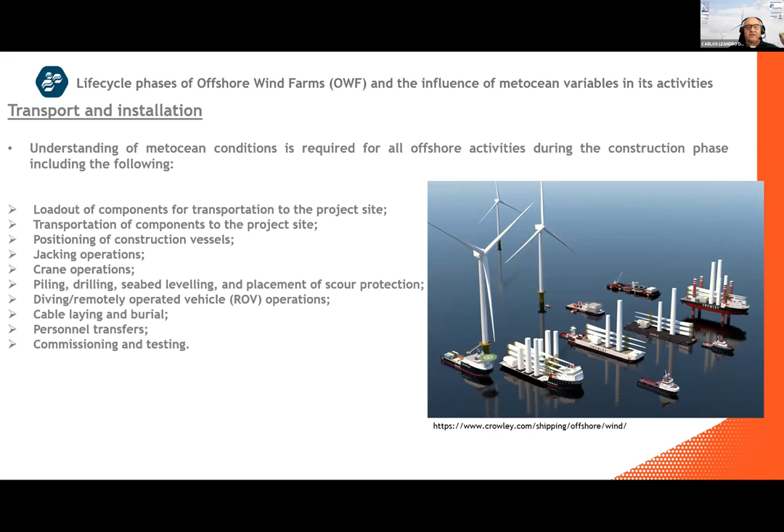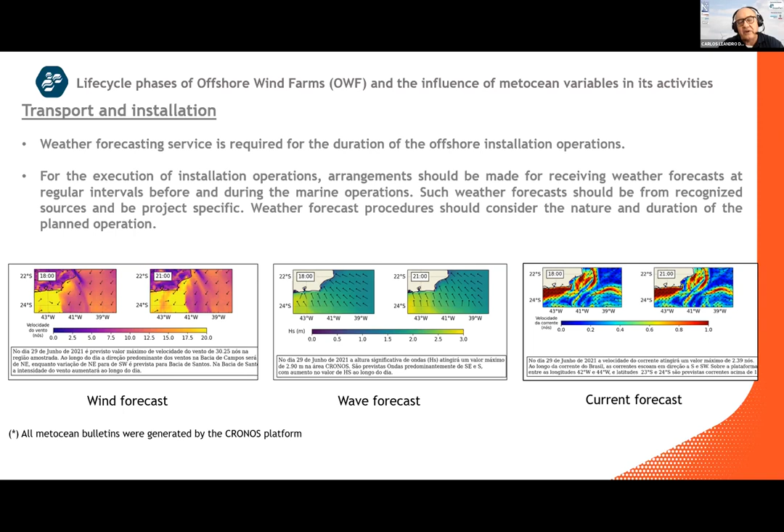All these items here, we need to consider during this phase, because you need a good prediction for this kind of operation. In our case also, we need to generate every day good reports, good bulletins that can support all the procedures in order to have a safe condition to operate in each region, okay? In our case, we have a wind forecast, wave forecast, current forecast.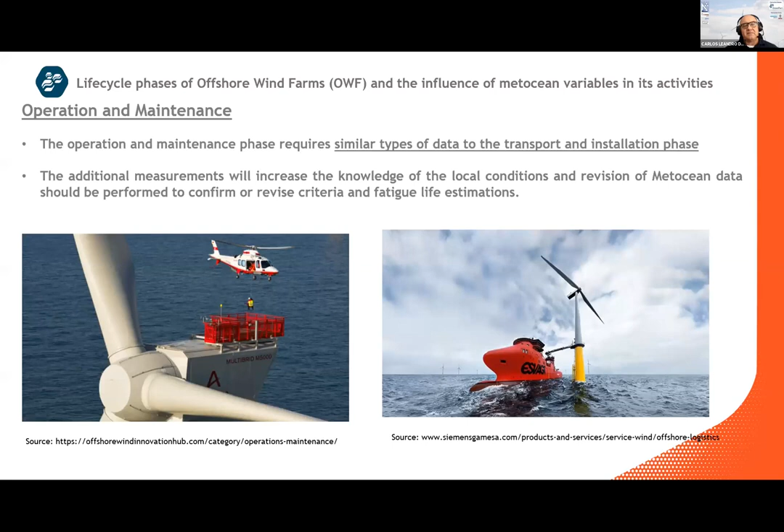Here is, of course, the same to continue. Of course, you have to consider, for example, all the schedule of maintenance: the turbine, substation, power cable, every item you need to consider. We need to have an excellent operation window. In that case, here I show the kind of product we provide by the Kronos platform, and you have, for example, the data of the waves, winds and the current, and depending on your kind of operation, I create a specific operation window so you have success during your operation.

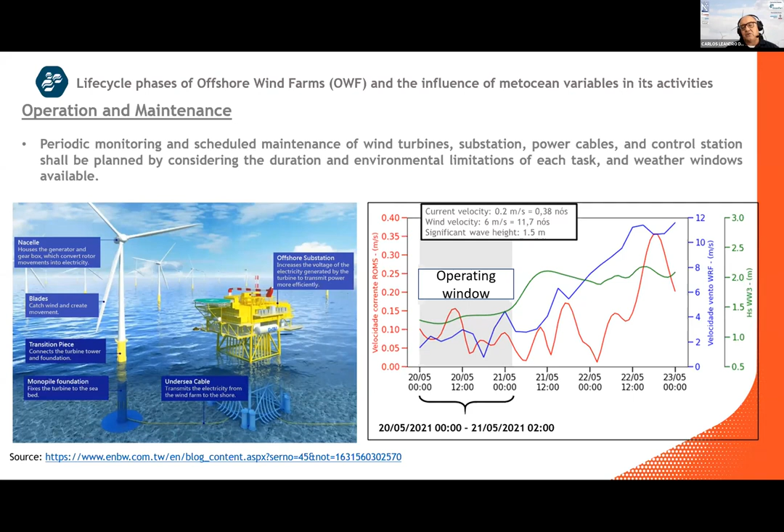And decommissioning is the last phase of your life cycle. And in that case, it's the same. You can use, for example, the same situation as in operation and maintenance. It's the same kind of data we need to use in this phase of decommissioning.

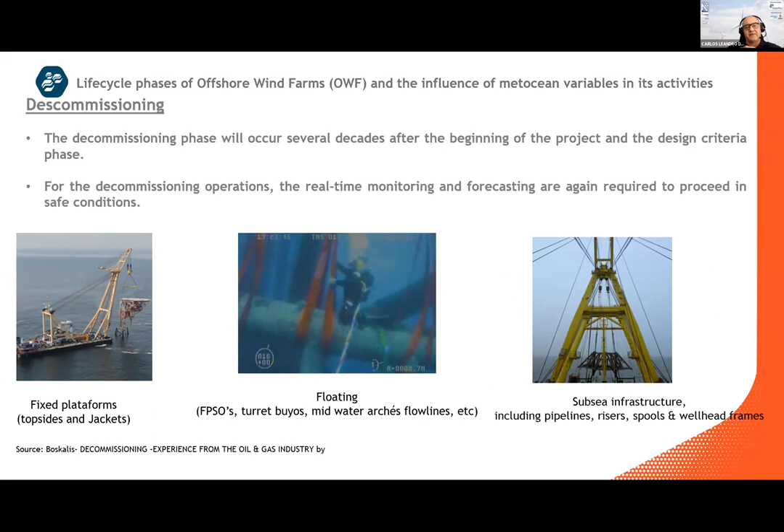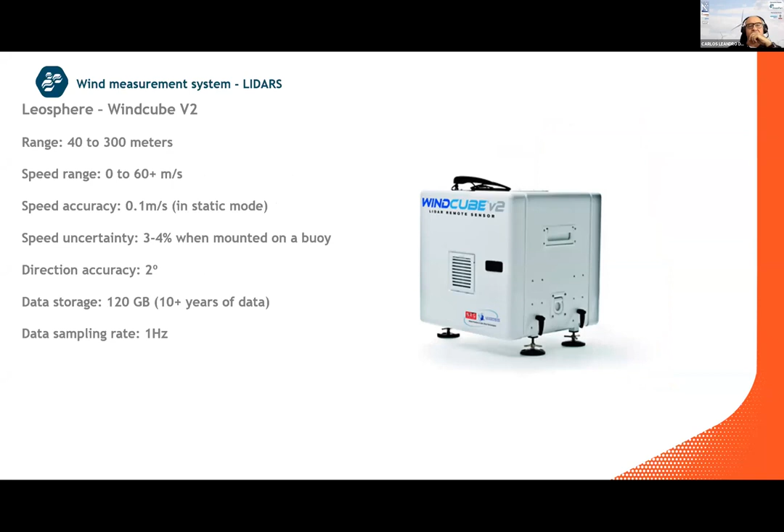The same happens with the Leosphere WindCube V2. These two systems dominate the world market in terms of LiDAR for wind monitoring systems.

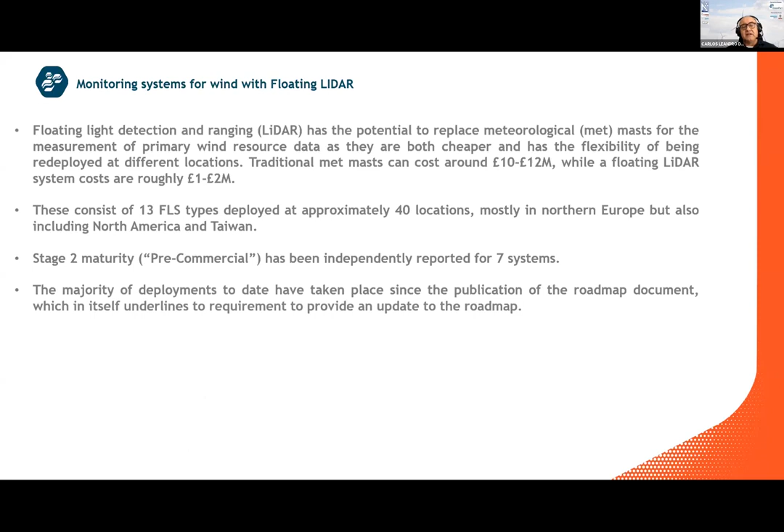This is the expertise area. The OceanPact group today is ready to support different projects, the different phases of the project I mentioned before, in terms of environmental management and consulting, development of environmental studies, and of course all phases of the implementation of the program; we can give this support for each one. And in the area of geoscience, we have geophysical, geotechnical, environmental, metocean, and surface and subsea positioning.

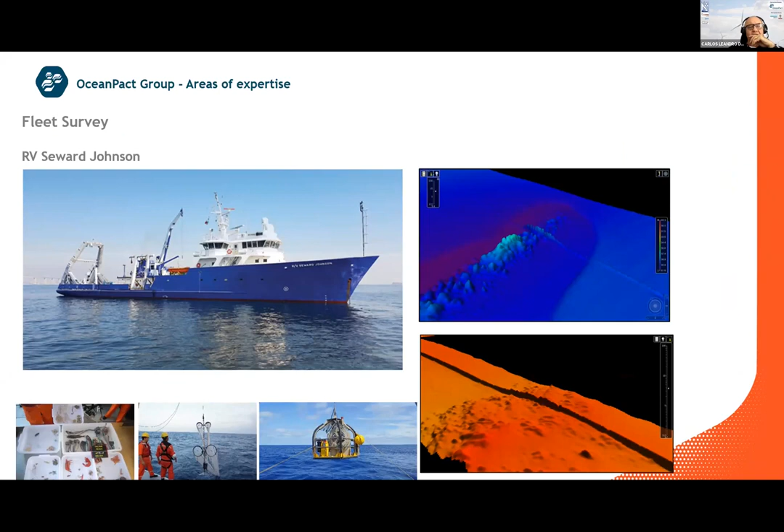We have a fleet of research vessels. This one, the Ocean Tower, has many winches, A-frame, positioning, everything you want to have good support. We have the Seward Johnson, a research vessel, an excellent one also, including the environmental area and the geotechnical area. Here, some geotechnical investigation, like seabed sampling, in situ tests, offshore soil lab, CPT, piston core of different sizes, vibrocore, box core, everything you want for geotechnical.

In terms of geophysical investigation, multibeam is the main system. We have it installed on the hull of the Ocean Tower, so we can operate all along the Brazilian coast. We have side-scan sonar, deep tow, sub-bottom profiler, shallow seismic, a magnetometer, and an AUV rated to 3,000 meters.

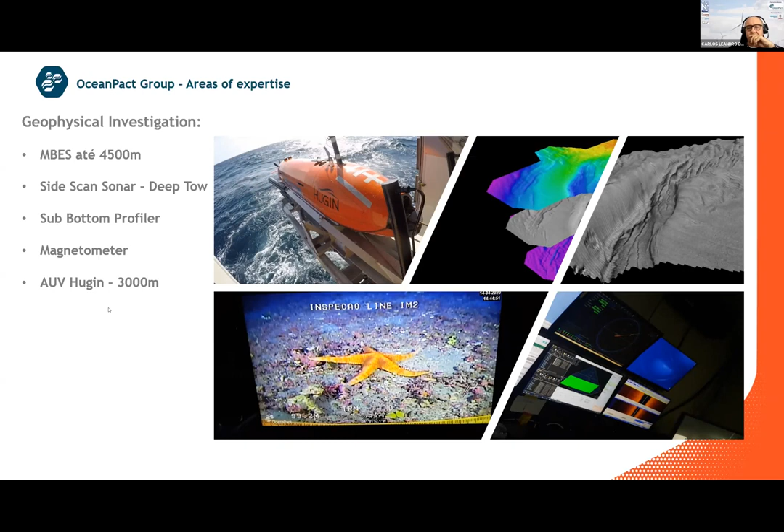Oceanographic mooring lines, installation, metocean buoys. A large inventory of oceanographic equipment in Latin America, including gliders, which are autonomous systems, and profilers for waves, tide, current, meteorological parameters, real-time data transmission, and in-house processing and reporting. We also have logistics, including a big offshore base in the Açu port.

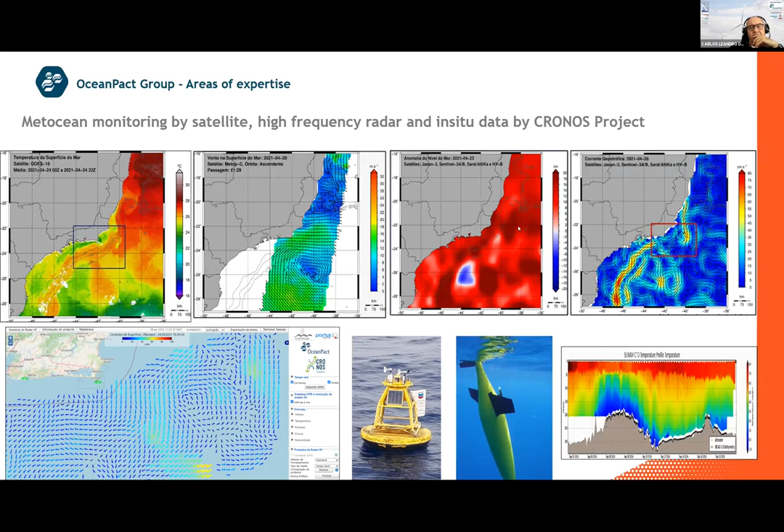This is the suite of metocean monitoring information. Today we provide monitoring by satellite, HF radar, and in situ data, with data by the CRONOS project. Here is a kind of report generated, for example graphs, tables, dashboards, customized for each client's needs.

And here, we have a partnership with EOLOS, a Spanish company. In our case, we use the EOLOS FLS 200 floating LiDAR buoy. It passed the test of the Offshore Wind Accelerator, part of the Carbon Trust, so this gives us the best technology for monitoring and collecting wind data. This is a view of the system. It's very cost-effective, versatile, energy autonomous and reliable.

Acquire the high-level data, easy transport operation, and in our case, in Brazil, because we have all this infrastructure to support the installation operation of the system, the company today provides this kind of service in Brazil. This is a suite of the...

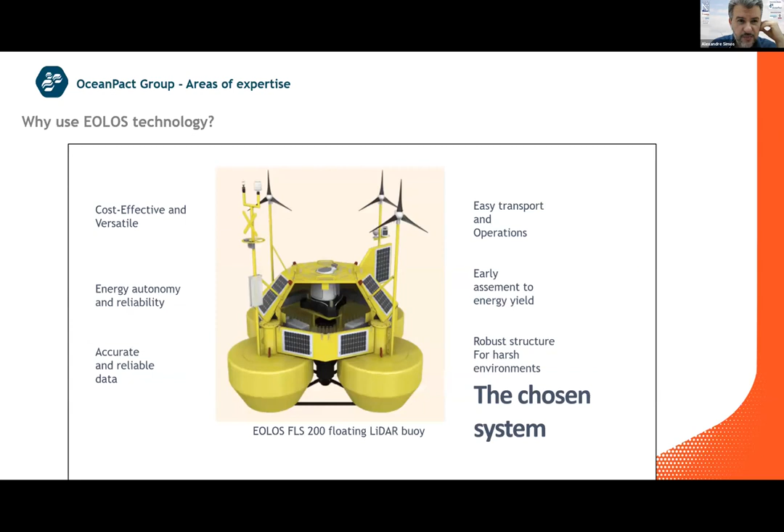Carlos, one minute, please, to conclude, okay? One minute, okay.

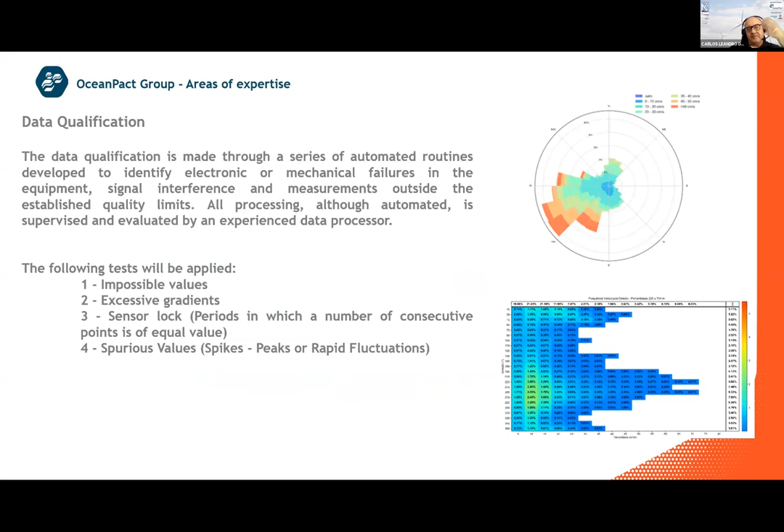It's a kind of the sensor you have on board of the system, the LiDAR, the power system, the mooring system installation, deployment, data qualification. Of course, conclusion: what happened in Europe and the US, and the learning curve obtained by the oil and gas E&P in Brazil will be used to support offshore wind projects, and this also reflects the environmental issues.

Metocean information with measurements generated by numeric modeling techniques plays a key role in the phases of the life cycle of the offshore wind farm. And regarding oceanography, the main variables in installation, construction, wind farm, I talked about all these variables.

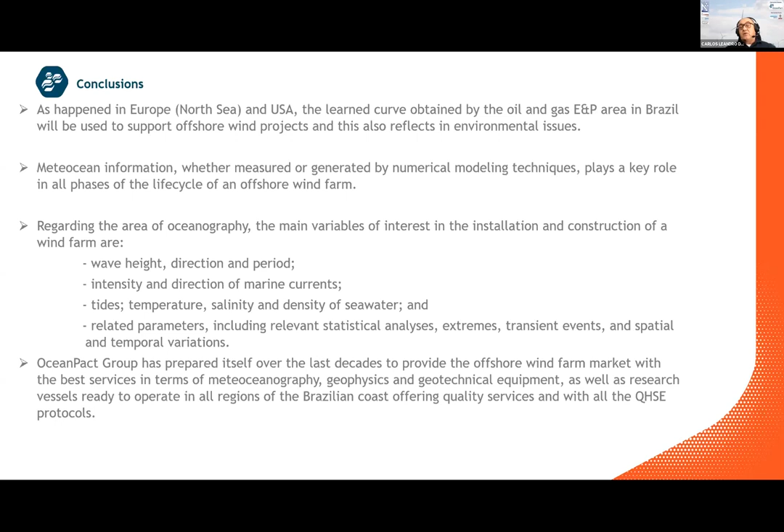OceanPact has prepared itself over the last decade to provide the offshore wind farm market with the best service in terms of metoceanographic, geophysical, geotechnical equipment, as well as research vessels ready to operate in all regions of the Brazilian coast, offering quality service and, of course, quality health, safety, and environment protocols.

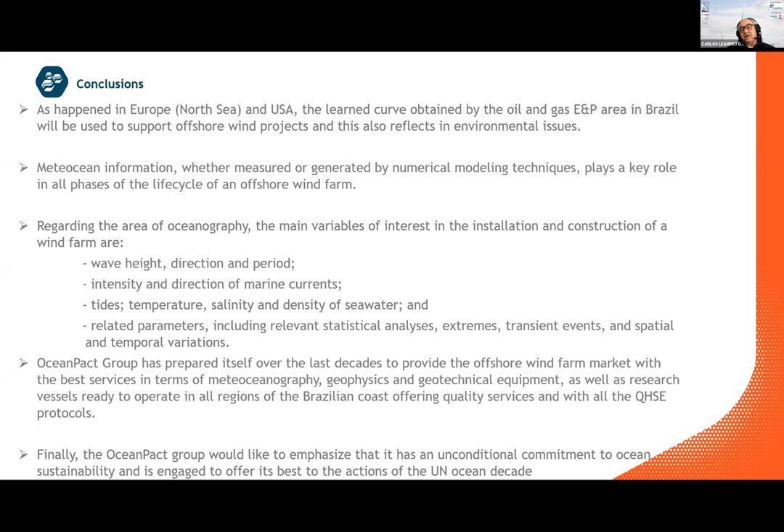And finally, the OceanPact group would like to emphasize that it has an unconditional commitment to ocean sustainability and the engagement to offer its best to the action of the United Nations Ocean Decade. Okay, thank you.

Thank you very much, Carlos, for your nice presentation. It's of course a quick one. Unfortunately, it's an interesting subject that we would like to discuss for a long time. And of course, data gathering, metocean monitoring is crucial for all the phases you mentioned, from planning to design to operation and maintenance. So very interesting presentation. Just one curiosity of mine, because we are ahead of time now.

If I understood correctly, the instrumentation that you plan for wave monitoring, especially long term, because we need long-term wave monitoring also for fatigue analysis and statistics of reliability of the equipment and so on, is based on wave buoys more than, for example, radars or something like that?

In fact, you can use both. You can use the buoy. You can install, for example, a Waverider system that can collect the data for a long time and transmit by satellite, for example. Or you can store it inside the data logger system. Or you can use, for example, part of the fleet with a radar system that can collect the waves also, but during a short time period, not a long time period.